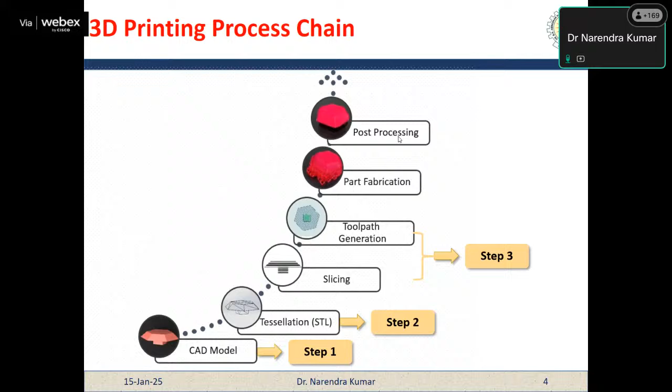So now let me show you the software packages available for use in the 3D printing domain. Here I have summarized some of the CAD modeling packages, in both categories: open source and commercial. In the open source category, we have FreeCAD, Google SketchUp, OpenSCAD. Other software is also available, Tinkercad is there.

But when I talk about the commercial softwares, here we have CATIA, Creo, SolidWorks. Fusion 360 is also very popular, SolidWorks is very popular, and CATIA was very popular 10 years back. And Pro/E, nowadays known as Creo - 10 years back, CATIA and Pro/E were on top in the commercial category, but now SolidWorks also has some place in this category.

And if I talk about the slicing and STL repairing packages, under the open source category we have Meshmixer, we have MeshLab. And under the commercial category we have NetFabb with Fusion 360, and Magics from Materialise. It is also very popular. Okay.

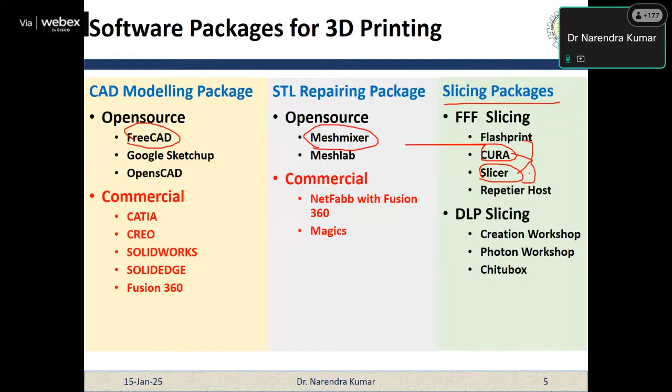So you all know CAD modeling is the essential step, right? Because as per the definition of 3D printing, it is a process by which we can convert the CAD model into reality. If you have any idea in your mind, the first step is to convert that idea into a CAD model, then CAD model to physical model. So the CAD model is a very essential part.

If you go into the market, you will find various software, as I have mentioned in my previous slide. So here I will be discussing FreeCAD. It is an open source parametric 3D CAD modeler. So here I will stop my presentation. I will directly switch to the software part.

So here now I have opened my software. Okay, this is at the bottom. You can see that here I have opened the FreeCAD software. So when you open it, this kind of window will be opened. And it will ask which theme you want to keep, light theme or dark theme. So here I have chosen the light theme, because I like it.

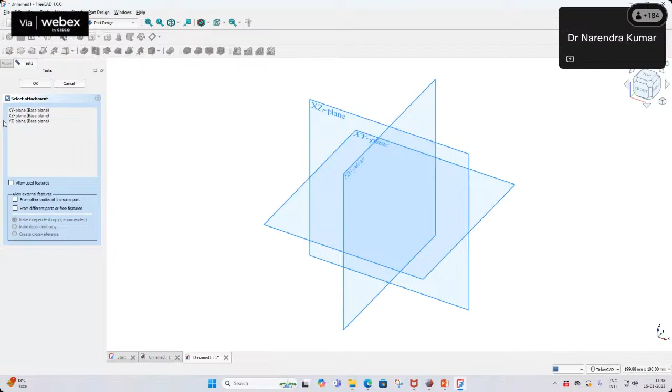And on the left side, there is the option to create a sketch. When I move my cursor there, it is showing create a new sketch. So I will click on it. Now it is asking to select the plane. In 3D printing, generally we do sketching or CAD modeling in the XY plane, because the XY plane belongs to the build platform. So here I am going to select the XY plane, and then I will click on OK.

So the window is quite similar to SolidWorks, right? Once I click on the OK button, other options will appear on the top in red color. If I move my cursor here, the message is create point. Second thing is create polyline. And there is another message, M key cycle behavior.

And once you press the M key after selecting this, for example, this is polyline. So now I am drawing a polyline, like this. If I press the M button in between, you see what is happening. See, the behavior of this line is changing, right? So we can change its nature by just pressing the M button. For example, this is my closed polygon, which I have drawn using this polyline command.

Now, for example, let me tell you the dimensions, right? Because how we will do the dimensioning of this. So for example, this is my sketch that I want to convert into the CAD model. So from the upper symbol, this symbol A, or the angle symbol is there. So you can give the dimensions.

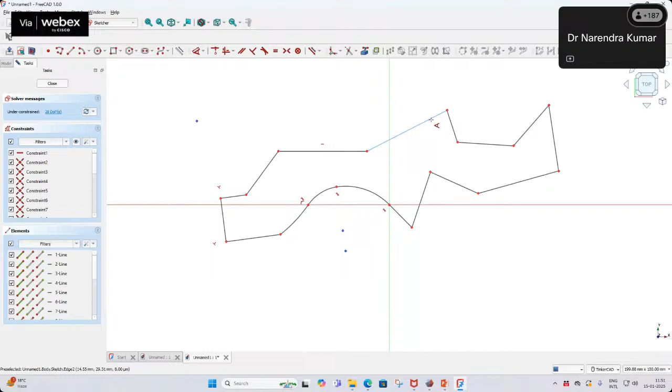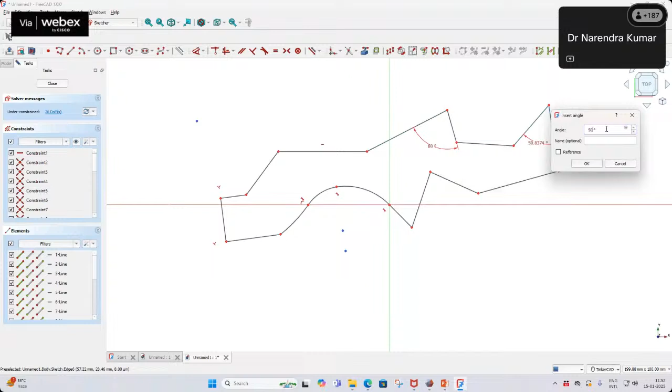And also suppose I want to give the distance, for example, 15, so I can do it. I also want the length of this line to be 30, right? 35 and then 12. Okay. So in this way we can do the dimensioning of the sketch. We can constrain the entities. If we want to fix their position, we can do it.

So this software is very simple, right? And it is openly available. If you just search FreeCAD, you can click on the first link. The current version is FreeCAD 1.0, which I downloaded today itself. So this is how we can easily download it. When you click on the download button, the downloading is started.

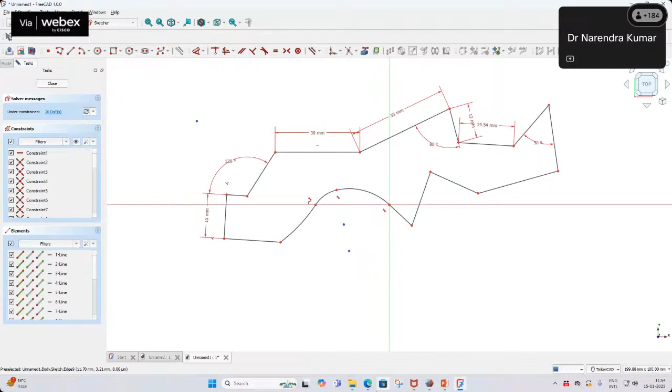Some disturbance is there. Ravi sir, please check. Some disturbance is coming, I don't know where from. Okay, I'm checking, sir. No issue.

So let me close it, right? When I close it, some new options appear on my screen. Previously on the top, I had the options related to sketching, but now the options are related to CAD modeling, to convert this sketch into a 3D model. So on the left side, we have a pad command. Pad. This is, I think, similar to CATIA. There also we have the pad command.

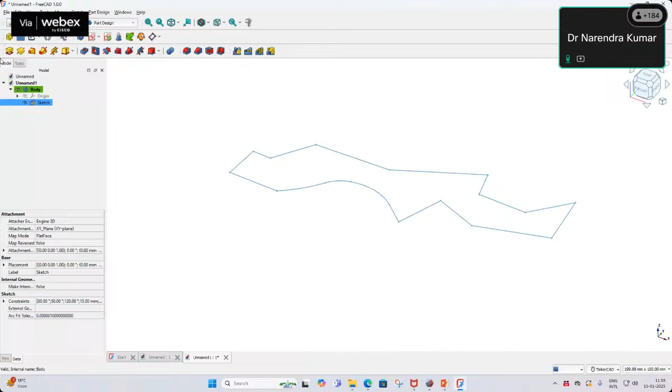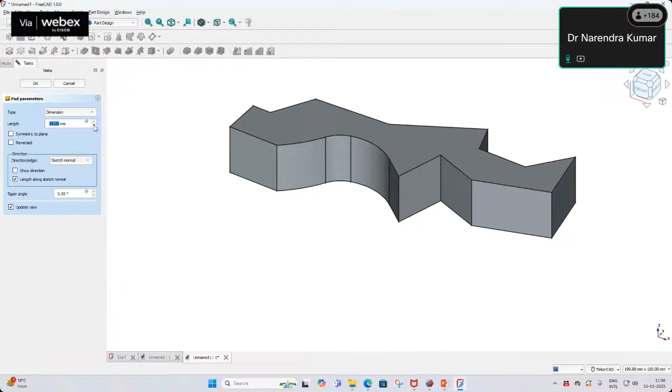So in the pad, see, when I click on the pad command, what is happening? Now my sketch has been converted into a 3D model, or we have given the thickness along the Z direction. So see what is happening. I can change its thickness. I can change it to 5 mm. I can keep it to 50 mm also. I can directly write 50. So its thickness will be changed immediately.

So again, if I want to edit it, I can do it easily. So these kinds of features are provided in this software that can be used for CAD modeling. Now let me keep it to 10 mm only, otherwise it will look very weird. Now if you see, my model has sharp edges on the corners.

So for example, suppose I want to give the fillet or the chamfer command. I will use this. I will pick this edge, this edge, this edge, this edge. So let me do the experimentation. You can see the radius currently. And from here on the bottom I can use it for all the edges. When I click on all edges, it will automatically pick all the edges, whether they are on the top, the side or the bottom.

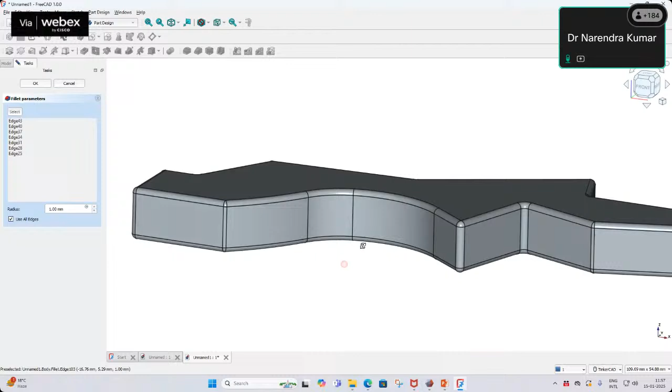And suppose I want to change this radius to 2 mm, 3 mm, 4 mm, 5 mm. Up to a maximum it is taking only 4 mm, because otherwise it will not be possible. So let me make this model. So now this is my CAD model. My objective was to prepare a CAD model for 3D printing, right? So can anyone tell me what is the next step? What do I need to do now?

Ravi sir, please allow participant to speak.

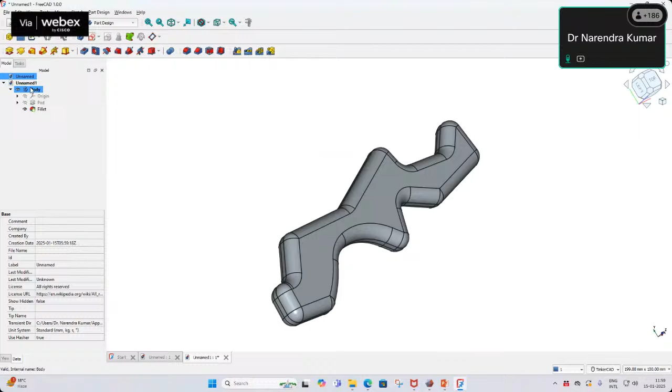Sir, to prepare STL file. Yeah, prepare the STL file. Very nice. Okay, so now what we will do? We will go for the STL. Okay, first let me show you one error actually that may come. See what is happening. Select the objects to export before choosing export command, right? So because I have not selected any object, that's why it is not.

But now I have selected this. So now when I go into the export command, I will find the various file formats that can be selected. So here we have the 3D manufacturing format. Additive manufacturing format is also there. This is also becoming very popular nowadays, right? Because STL has many issues, so that I will be talking today.

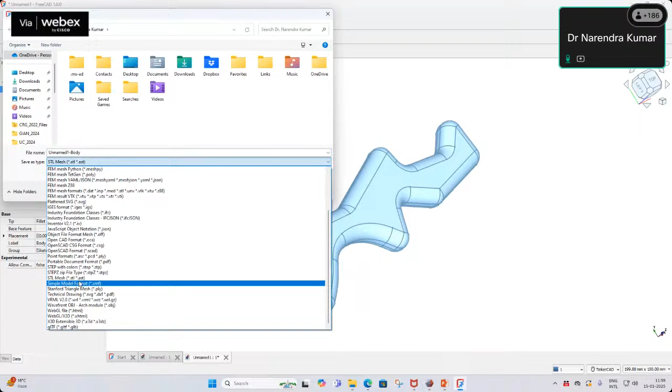So let me select the STL from here. Okay, so here I think we have this STL mesh. Can you see this STL mesh? And in bracket we have the extension .stl. So let me give the name. So I am just going to give this NIT KKR, right? NIT KKR, and I will select this.

Okay, now I will open my STL file, right? So this is my STL file, and I will open it with the notepad. Can you read this? Can anyone tell me the meaning of this text? No, because we cannot read it. This is not human readable, that's why we cannot read it, right? But now you can see the length. We have almost 19 lakh characters into this single STL file.

Now let me go back to my presentation. Up to this point we have discussed the features of FreeCAD. So now because we have exported the CAD model into STL file format, the file is ready for slicing, but before slicing I will check my STL file whether it is correct or not, whether it is accurate or not. So what is the meaning of accuracy? That we will understand, right? So in order to edit or check or see the STL file, we can use Meshmixer.

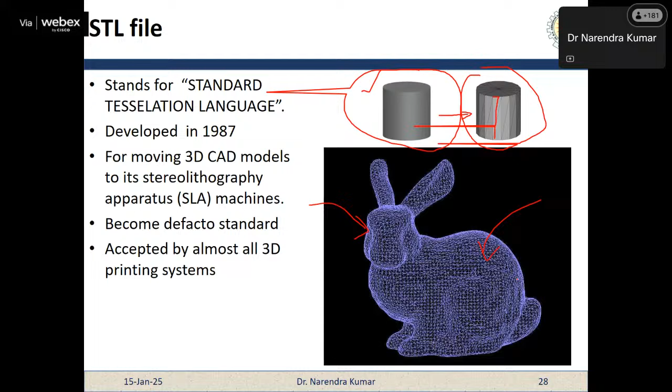So STL is nothing but the triangular representation of a 3D surface geometry, and here we just export the information in the form of the facet and the normal. Due to the time restrictions, I'm not going in much detail.

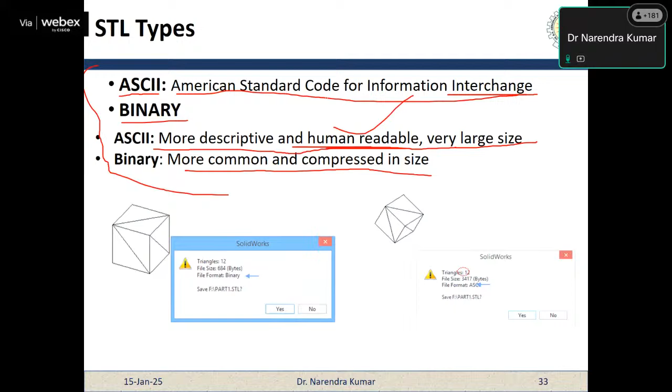So this is a typical example of an ASCII file format, and here we have the example of a binary STL file format, right? Now, what are the advantages of the STL file? Why are people using this file format in the 3D printing domain? The first advantage is it's simple to understand and very simple to code, because I told you that we can easily open the STL file in Notepad.

Second thing is that it minimizes the computational overhead during slicing. This is very, very important. That's why I have changed the font of this statement. How? Because it contains triangles. For example, in the case of a cube, only 12 triangles are there.

Slicing is the essential step of 3D printing because it's a layer by layer technology, because we add material in layered form. So in all 3D printing cases, we have to slice the CAD model into layers. So with STL file, it is very, very important, right? Because it minimizes the computational overhead.

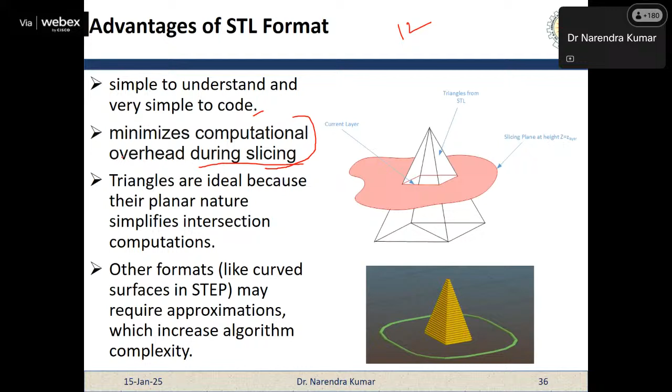So that's why it's very popular, because triangles are ideal due to their planar nature, and they simplify the intersection computation. This is one of the reasons why people are using it, and nobody is able to get rid of this file format.

As it has some advantages, it also has some disadvantages, like long syntax, and it is many times larger than the original CAD data for a given accuracy parameter. Because if you do not maintain the parameters of the STL file, what will happen?

You will not be able to capture the original CAD data surfaces accurately. So for the given accuracy parameter, if you go for the STL, obviously small triangles will be used there, or the number of triangles will be more. So it will be very large in size compared to the original CAD data, and it carries much redundant information.

How? Here I have taken one case, this one. So if you see, we have 1, 2, 3, 4 triangles, right? So when we export this data into STL file, what will happen? There is one common edge between 1 and 2. Similarly, between 2 and 3, 3 and 4, and 4 and 1, right? So what will happen when we export it into STL file?

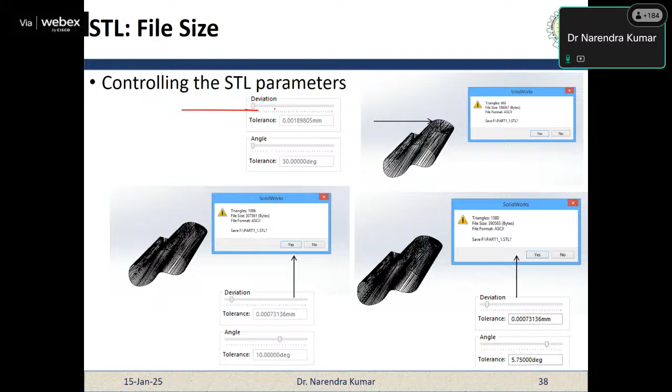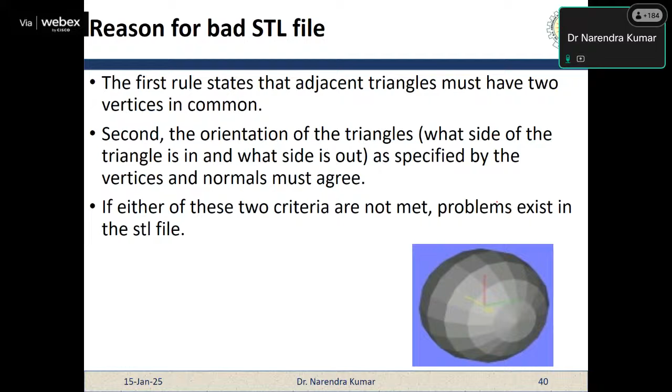So this is how we can change the parameters. For accuracy, you can play with the parameters. There are many reasons for a bad STL file. I am not covering that in detail. I will share this presentation with all of you, so you can go through these errors and what they mean.

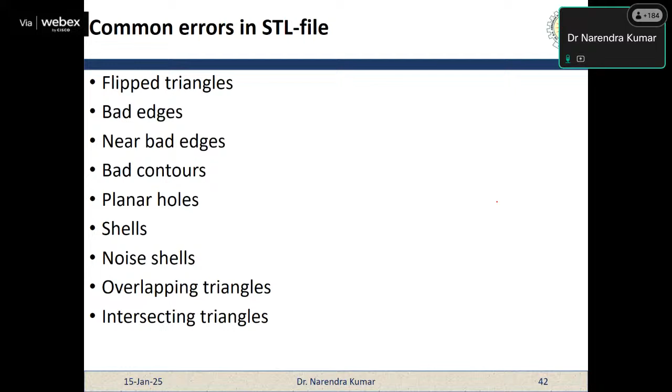Now I'm going directly to the software part. Suppose any error, hole, or puncture is there, how can you rectify it? How can you repair your STL file? So here I am giving you some of the cases. These are the errors: some overlapping facets, some edges overlapping each other, some shell problems. Now let me just go to Meshmixer.

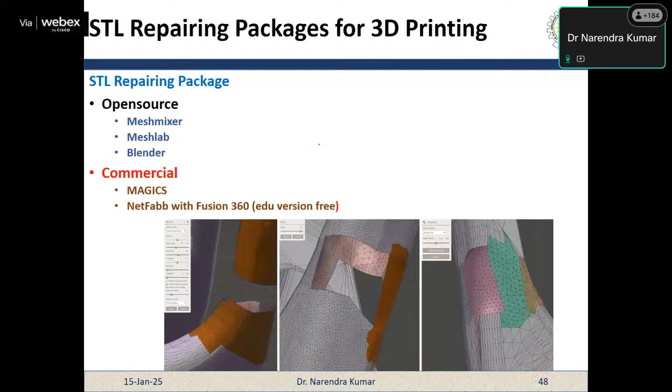So here I have opened this Meshmixer window. This is the user interface of Meshmixer, where you will find some options on the left side, some options in the center of the screen, and some file-related options on the tab on the top, feedback, help.

Although Autodesk has discontinued this version of Meshmixer, they are not updating it because they are promoting their next product, NetFabb with Fusion 360. They are promoting that one because it is commercial, but its educational version is free. So they have discontinued this software, but it still has a lot of features that can be used.

Now let me import my file, the file which I prepared. Where is it? Yeah, this one, NIT KKR. So this is my file.

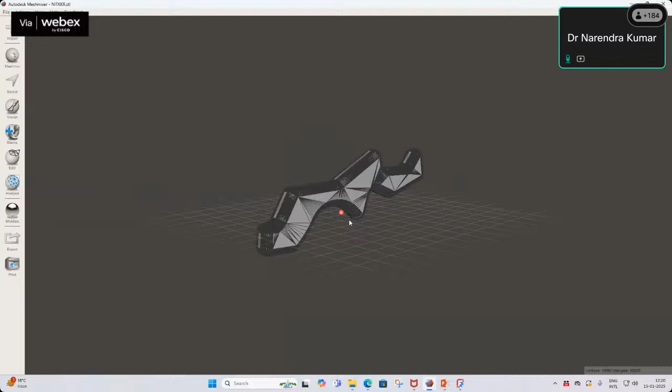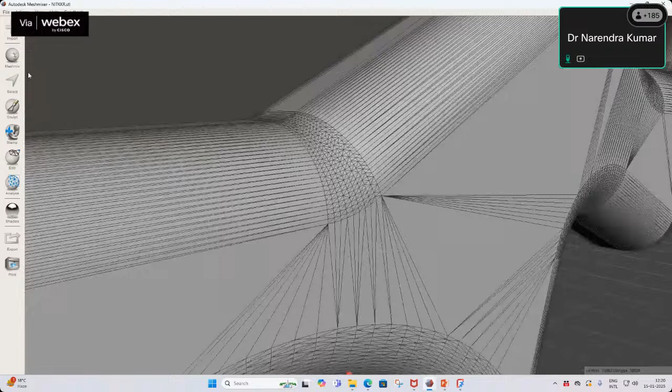So you can see the triangles, right? I'm zooming it. Now you can see the triangles. Can you see the triangles, Ravi sir? Yes, yes, participants are writing in the chat box that they are able to see.

Okay, so you can see this because my model has curved surfaces on the top, sorry, on the edges.

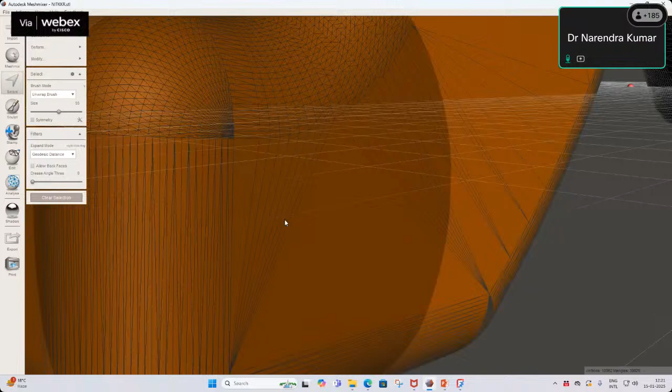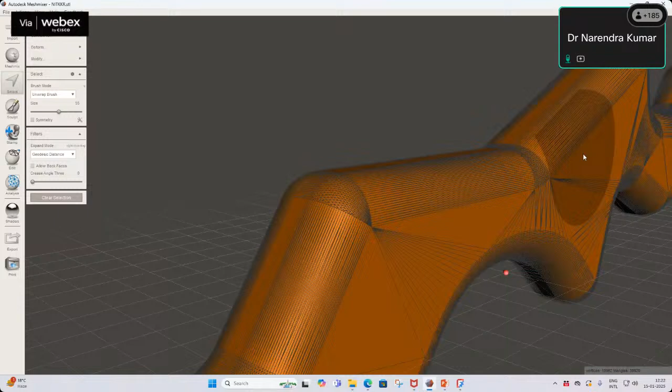Okay, so wherever I am having a flat surface, the number of triangles is less, right? On curved surfaces, to approximate the curved surface, we have to increase the number of triangles. So just for example, here we have the curved surface, and we have more triangles in this region only. So triangles are varying in number depending on the type of surface, whether it is flat or curved.

Now, for example, I want to edit this. I will check my model first, I will analyze my model to see whether it has any kind of problem or not. So when I inspect it, I don't find any kind of error in this because it is a closed model.

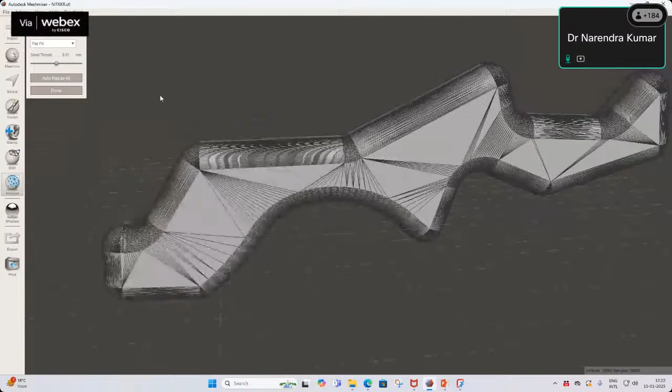But for example, deliberately, what I will do is delete these triangles. Okay, now you can see the hole. Can you see the hole in the STL file?

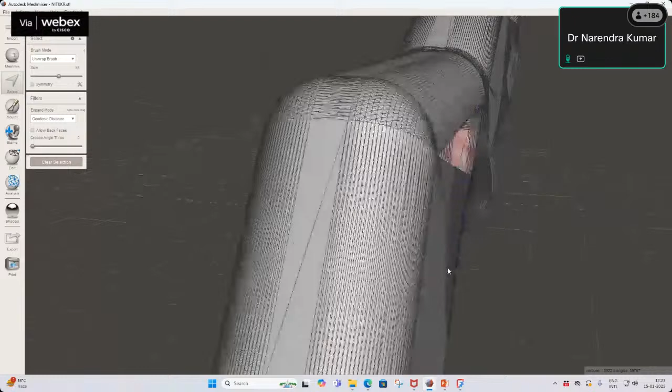Deliberately I have deleted this patch, this triangle, from my STL file. So now I can see inside my STL file because of this hole.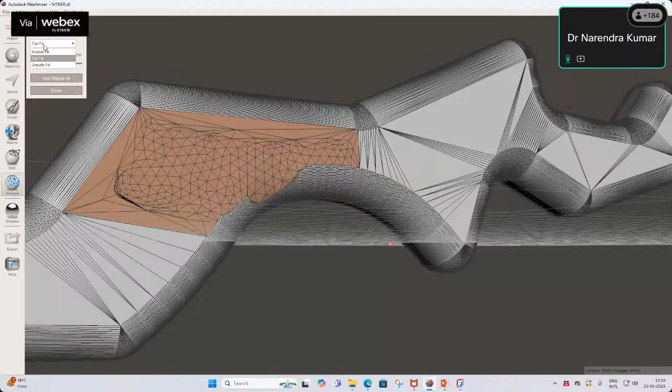Now again I will inspect the STL file. It is showing that it has a problem. See, what happened? Because I selected this option, flat fill, that's why this curvature has been deteriorated. See, now it has become flat.

So instead of going for flat fill, I will go for smooth fill. Now it has filled the file smoothly. See, from the side also.

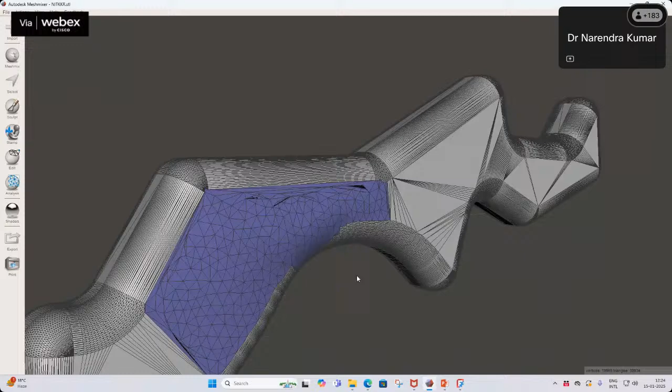Let me change this. Under view, platform, where is it? Yeah, grid, I have removed it. Actually, it was hindering the view.

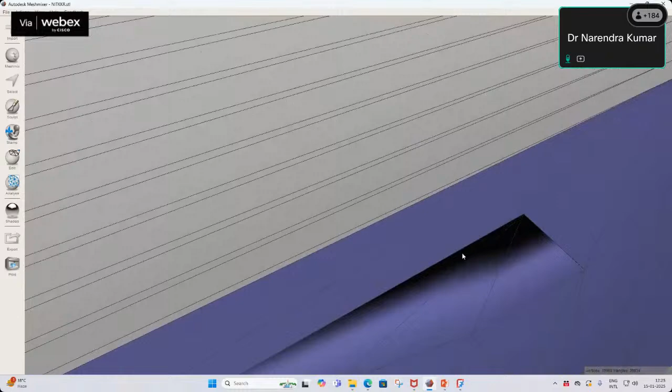Right now, again there is a problem. When I use the inspector command, there is still a problem with my STL because here I am having missing information. Although it is closed, it is having some sort of error. So in that case, I can go for the brush.

Okay, so I can, I think it has... let me see what is happening. Let me reduce the size. So this was the case, and from here I have chosen this.

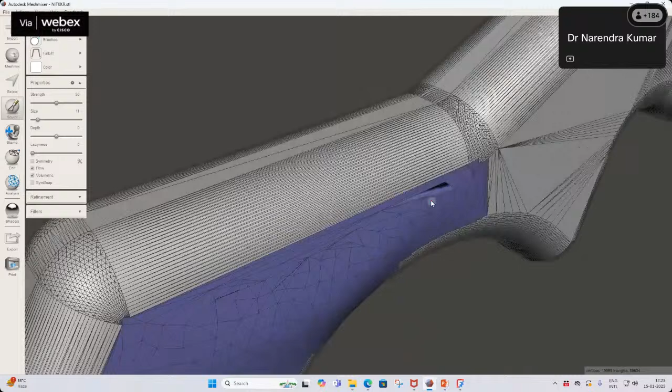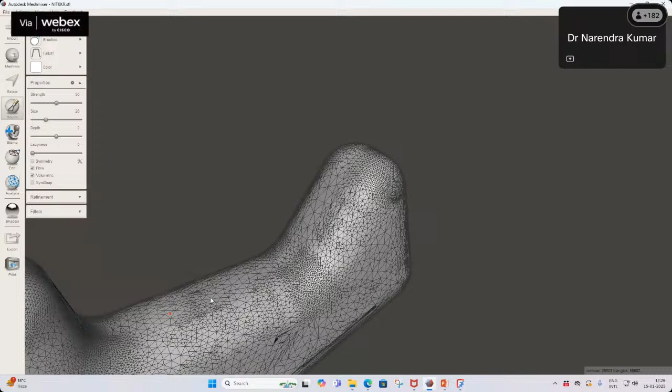See, it is smoothing the STL file now. It is increasing the number of triangles. See, earlier... I am smoothing my STL file. See, the triangle count is changing. And now my STL will become very smooth. So with the help of the brush, what I am doing is smoothing the STL file. Now can you tell me the number of triangles in my STL file?

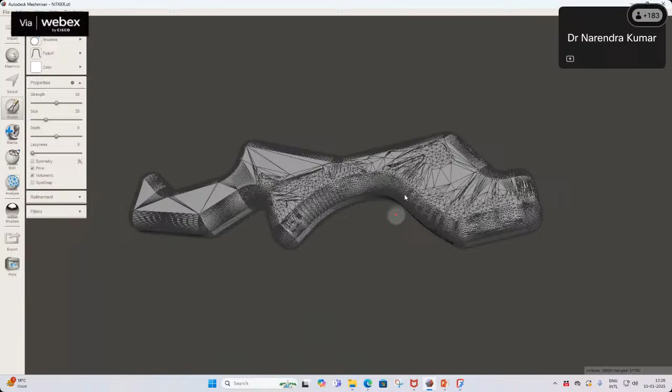Can anyone see the number at the bottom right? It is approximately 28,898. As I am using this brush on those triangles, it has now become 30,119, now 30,288. This is because as I am smoothing my STL file, it is increasing the number of triangles and increasing the accuracy of the STL file.

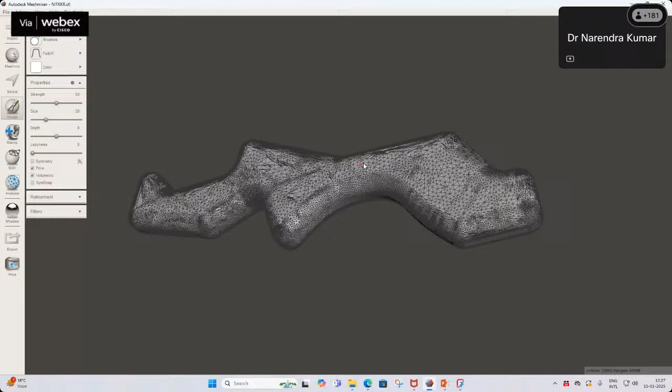Now the triangles are 65,096, sorry, vertices are 32,550, triangles are 65,096. Sorry for the error. Now suppose I want to smoothen this surface. Now the triangles are 68,194.

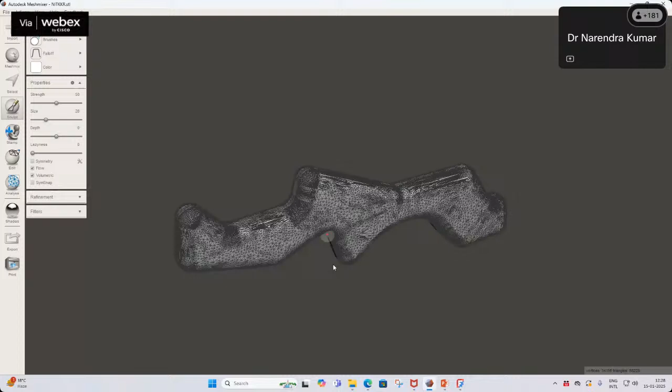Similarly, suppose I want to smoothen this part. So in this way you can edit your STL file, or if any error is there, you can repair your STL file. So suppose this region is also left, I will also smooth this region.

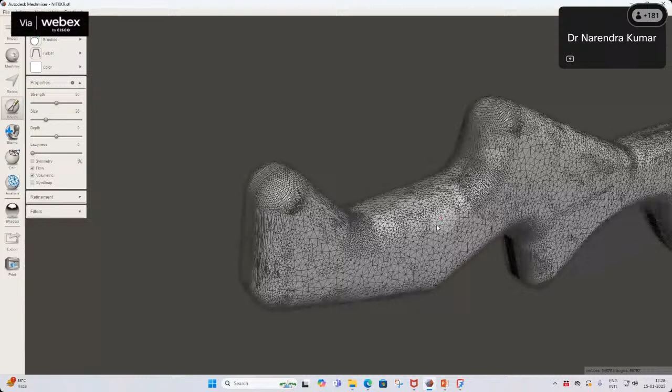So now my file is very smooth and very accurate. I can change parameters from here. So in this way you can modify your STL file.

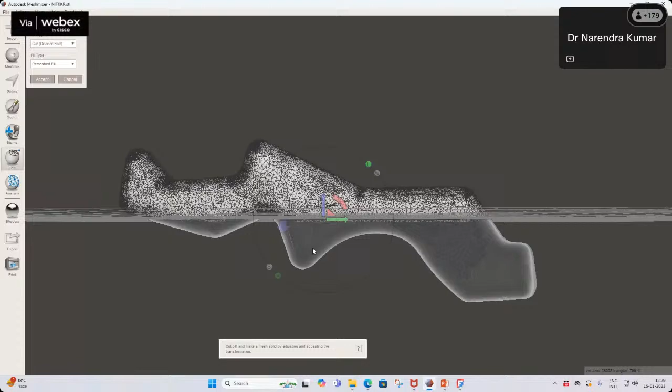For example, now I want to cut my STL file into two parts. Let's say I have a dual 3D printer and now I want to make the part using two different materials. So from here I will cut my STL file.

You can see that now we have some options like no fill, minimal fill, remesh fill, fixed fill. Remesh fill means, because as I cut this STL file into two parts, we will have two holes: one in the upper part of the STL, and one in the lower part of the STL file.

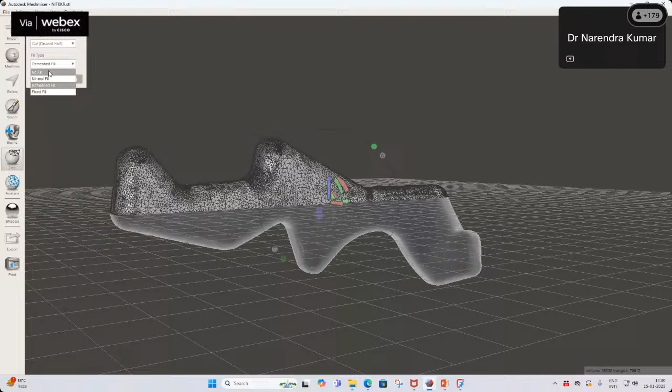Let me show you first. Initially, I am using this no fill option. Now what is happening? You can see this is not closed at all, and the bottom portion has disappeared. Why? Because here we have selected cut discard half.

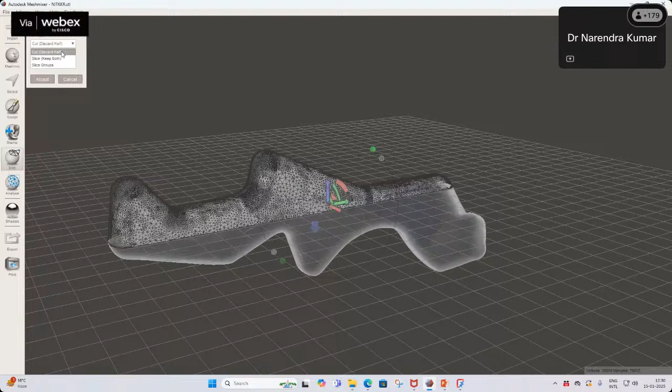But from here, let me show you the no fill and the remesh fill. Now, because I have chosen the remesh fill, that hole has been filled by the software itself. Earlier, because I did not choose the option, we had the hole.

So here, I'm going to just keep both the parts with me, because I have to print both parts using my 3D printer with dual material. So I will keep both the parts, but here we can see the parting line, a small thin line, indicating the plane where we cut the STL file.

Earlier, when I was using the same command, it was selecting the whole part. So now I can easily export this upper part into an STL file and also the lower part into an STL file separately. So two separate STL files will be exported for dual printing.

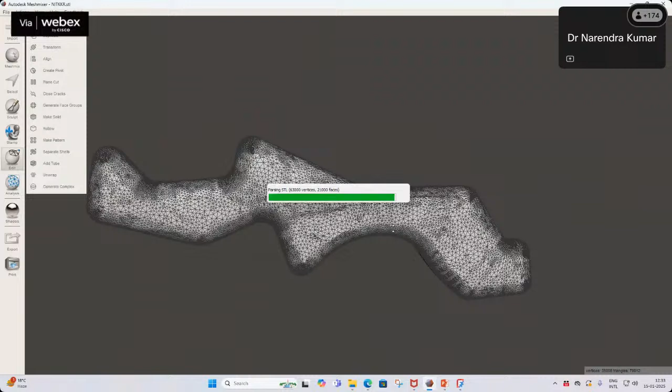So this is how we can do it. Now let me show you some other feature of this. To show other features, I will replace the part with the bunny. Where is it? I think it is in the Meshmixer library models.

So I have imported this bunny model, and here you can see that this model also has a hole at the bottom because we can see inside of the STL file. So I am going to inspect my STL file first, it is showing inspect and repair mesh defect. This blue balloon is showing the boundary of the hole. So here I have chosen this flat fill because I want to.

Dr. Narendra, sorry to interrupt, I think your slides are not visible now, please check. Sir, I have not changed my setting yet. Let me check, maybe again due to some network issue and all.

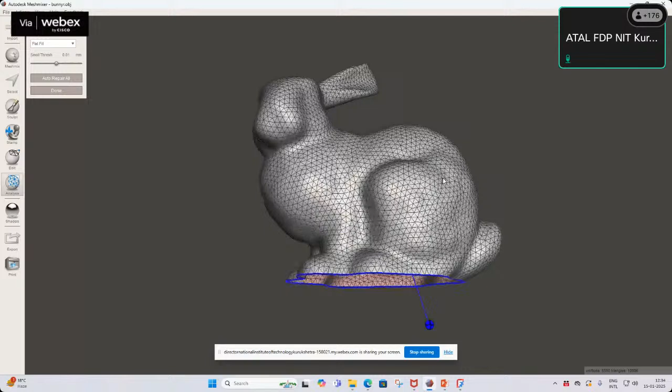Now tell me sir, yeah now it's coming, okay, thank you. Participant, can you confirm whether my slides were visible to you or not? Yes it is visible, now it is visible, but earlier it was not visible. So why didn't you inform me? Actually, you should have informed me. Actually they have written in the message box, so that's why I read that for you.

Okay, thank you, let me show you again. It is again gone, Dr. Narendra. Earlier it was there, how is it possible? I don't know, Professor, what is happening, but from my side there is no issue.

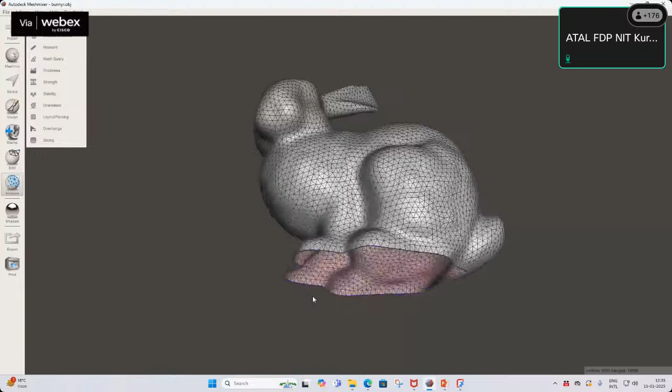Okay, yeah, now it's coming again. Yeah, no issue. So please inform me if you find any issue. Definitely, if you face any difficulty in my slide visibility, please inform me.

So you can see this is the CAD model, or the STL model of this bunny. If I go into the analysis or inspector command, it is showing the same options, flat fill, because this is the bottom part and I want to keep my surface flat.

Now see, slides gone again. Oh what is happening? Somebody is doing something, or is it a problem from my side? I'm not doing anything. It may be some network interruption. Actually we are unable to see, and our participants also. I don't think there is some issue.

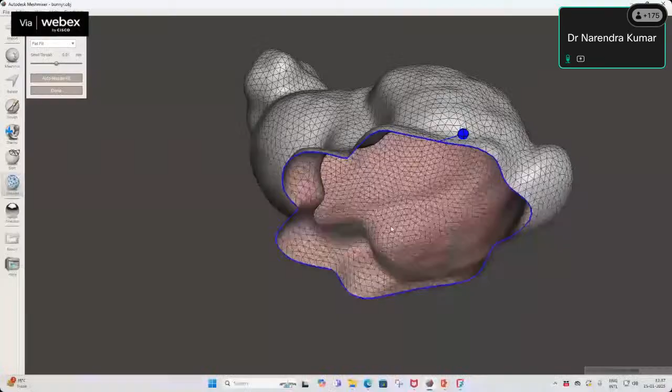Okay, so here now it is visual. Professor Ravi. Hani sir, yes sir.

Okay, thank you. So now you can see that in this object we have the hole, so I'm going to fill it with the flat fill command, and once I press auto repair all, now you can see it has been filled. And it is also having the triangles, meaning the surface created has also been converted into an STL file. So this is how Meshmixer can help us in the repairing process.

Let me show you a very important feature of Meshmixer. Suppose I have downloaded an STL file from the internet, because nowadays some websites offer ready-made STL files. For example, if you search the internet for a Taj Mahal STL file, or Ayodhya Ram Mandir, Ram Temple, you will find many STL files.

So, for example, you want to print them for your application, and somebody has written his or her name on the STL file. You upload the STL file and download it. Now the question is how you will edit that file, or how you will be able to modify it. How can you do this?

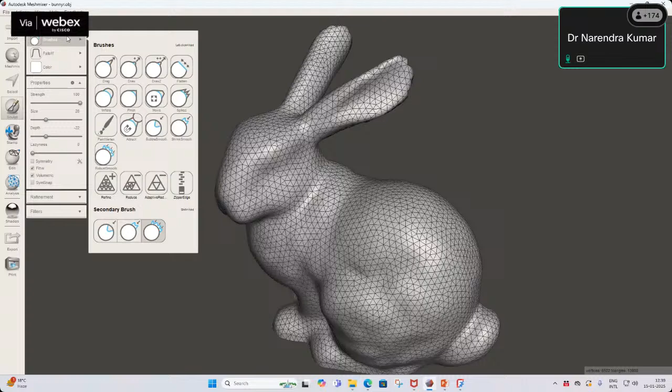In Meshmixer we have many options. For example... one thing I want to show you: I have deleted these triangles only, and now you can see there is a hole in the STL file.

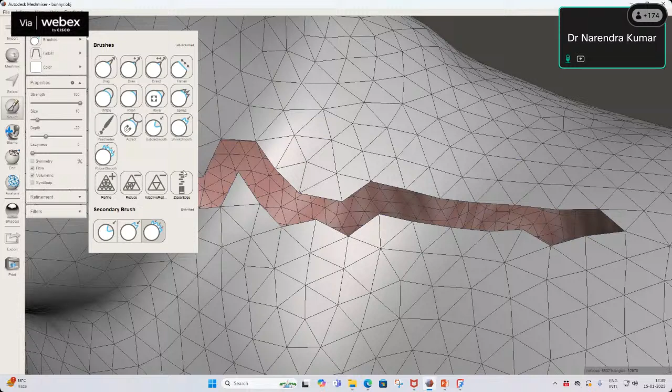Now, for example, here we have a zipper edge command. So if I zip it, it will zip the hole closed. See what is happening. So manually, if you want to fill any gap, that option is also available.

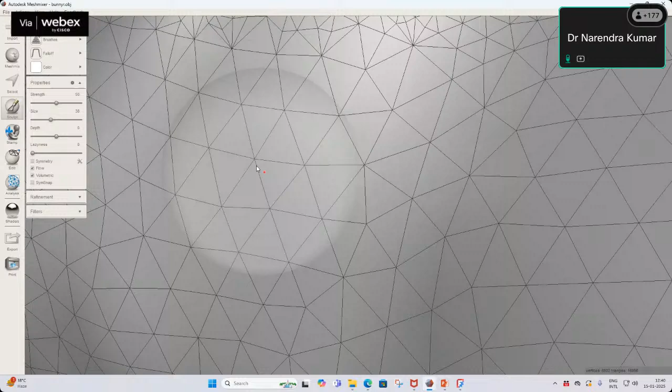Or sometimes you want to refine the mesh. Refine means, for example, here the triangle size is too large, and I want to refine it. So in this selected area, you can refine the mesh, reduce the triangle size, and enhance the accuracy. This is how Meshmixer works.

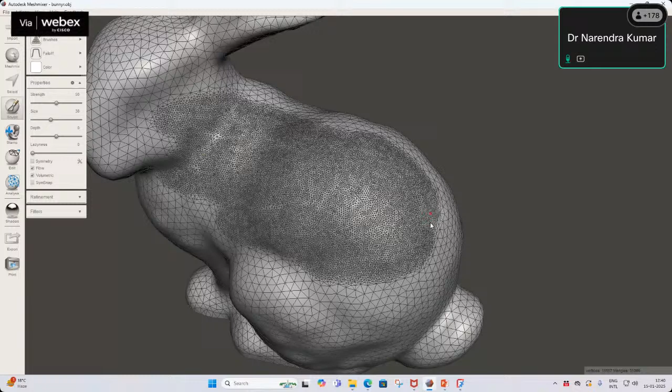Now you can see the difference. In the area where I used the refine mesh command, the mesh has been refined and the triangle size has been reduced. But in the area where I have not used this command, the size is as it is. So this is how you can refine the STL file.

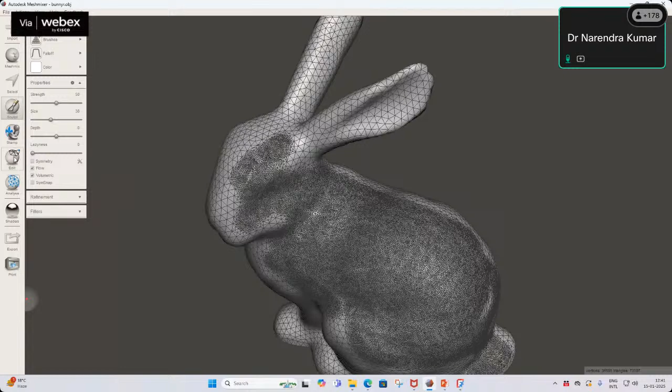And one more thing that is also very interesting. I am going to cut this STL file. So, for example, here...

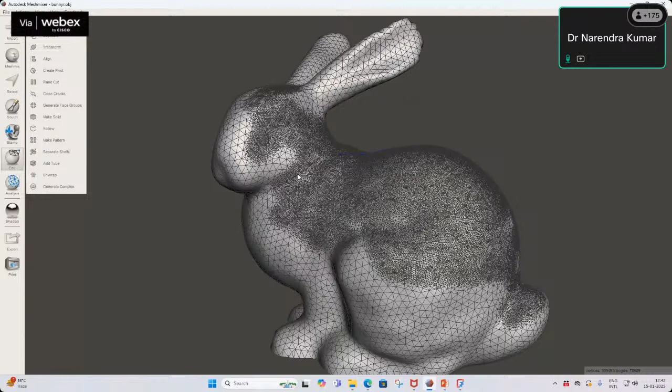For example, here I have cut my STL file. Now what I'm going to do is delete this part. Okay, I have deleted this part, and I want to modify this head with, for example, let's say this camel head. Let me take this one, and also let me change the size.

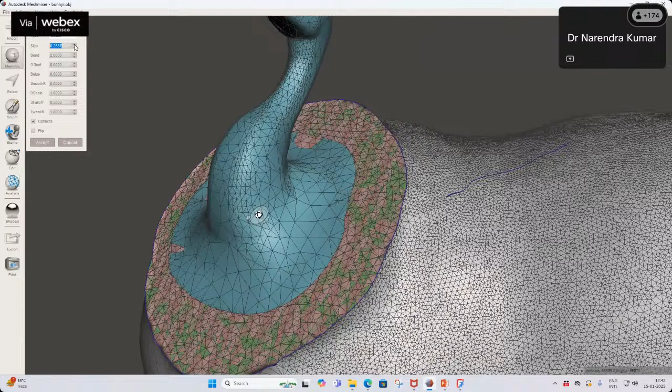I can change its position manually. Right, yeah, from here I can easily guess the position. Oh, I don't know what happened with the software.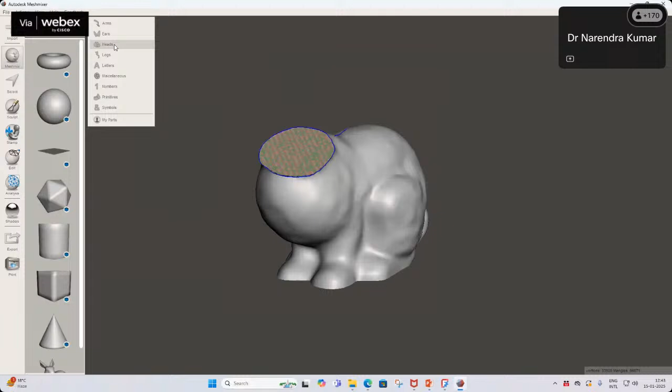So okay, this was my STL file, right, that I have cut down, and now I have added this from the front, and I have changed the size from here, right, and I also want to change it now. Okay, is it fine? Okay, now I think it is fine, right? Accept.

So during this process, what has happened? Here we have some flat surface, this flat surface. Although there is no problem with the STL file, there is no hole, right? But there is a problem with the STL file, right? So I will try to re-smooth it. I will be using this command again, because this will smooth the edges, right? This will smooth the edges,

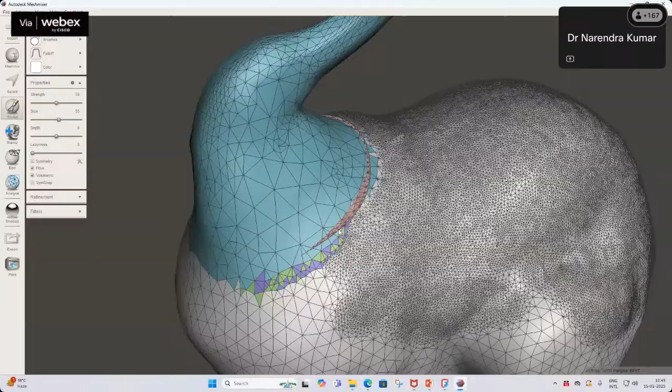and it will also help in the smooth transplant of this head, the virtual transplant, right, not an actual one. So smoothly you can do this process, right? You will never see any kind of joint or any kind of abstraction in this process, because we are using this command, right? So see how the whole STL file is getting repaired.

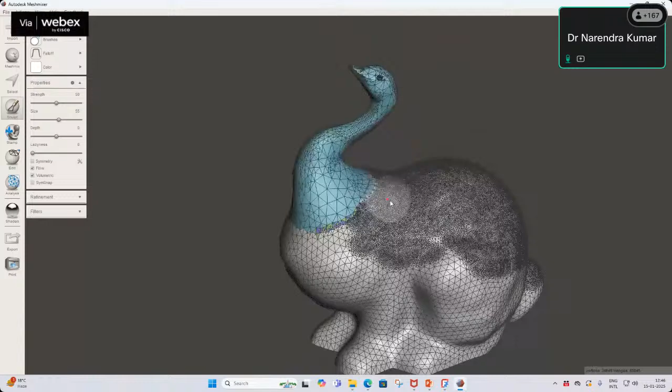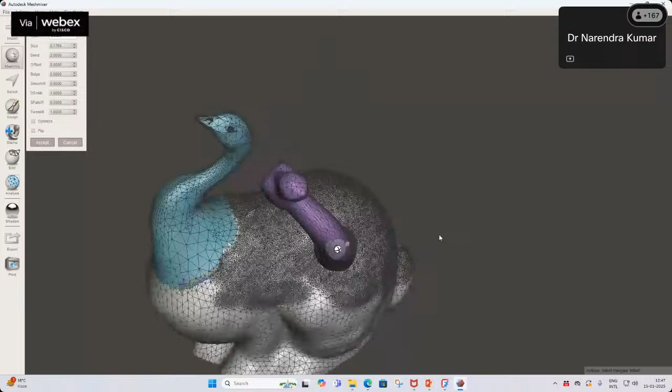So you see how I have changed the bunny model into some hybrid kind of model, right? So this is also possible with Meshmixer. You can also add some other options. Suppose, for example, here you want to... sorry, let me show you. For example, here also I want to keep the camel head. Right? I can change its position. Right? So in this way, you can easily make the models. You can easily mirror it. Right?

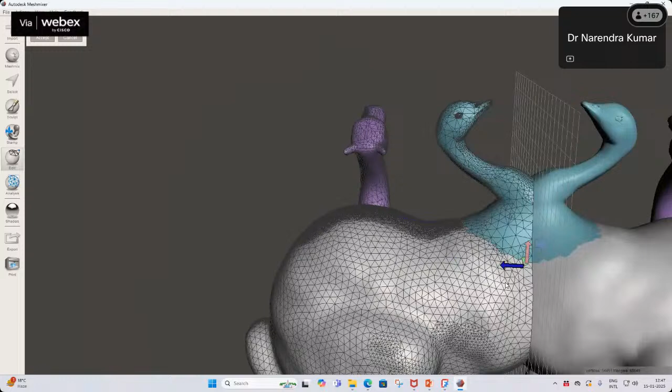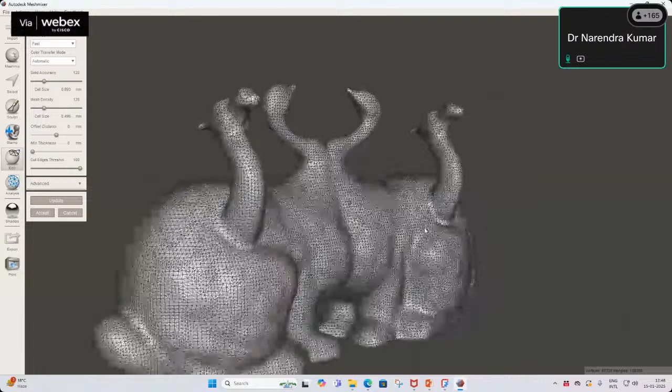For example, you want to make this kind of complex model, souvenirs and new kinds of models which are not available in the market, so you can easily make them. This is the capability of Meshmixer, right? STL editing: it allows manipulation, it allows repairing. So then I can make it solid, right? Now it is solid. There is no separate solid part in this. This is a single STL file now. Can you see? Right?

So with this, I think it is enough for today. If you want to explore Meshmixer, FreeCAD more, you can ask if you have any query. Dr. Ravi, it is all from my side, right? Okay. So this is the outcome of the lecture. You can see the model which we have prepared, right?

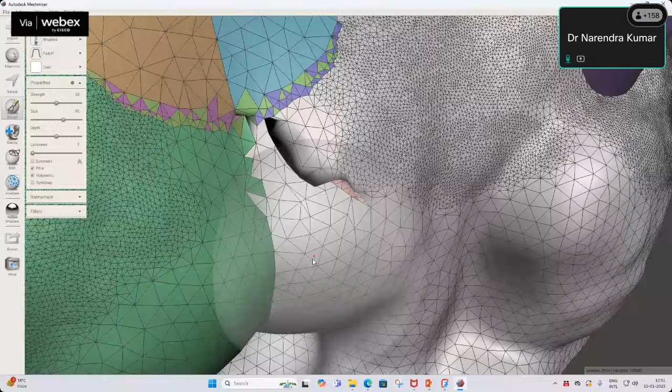Oh, sorry. Actually, now my model has been changed. You can just go in the brushes and use the Zipper Edge command. It will do it for you, because my model now is that much complex. So I can use many other options along with it. So now it has just filled the gap. Okay, filled the gap, and some other parts can also be smoothened by using other commands. So I think now it is clear.

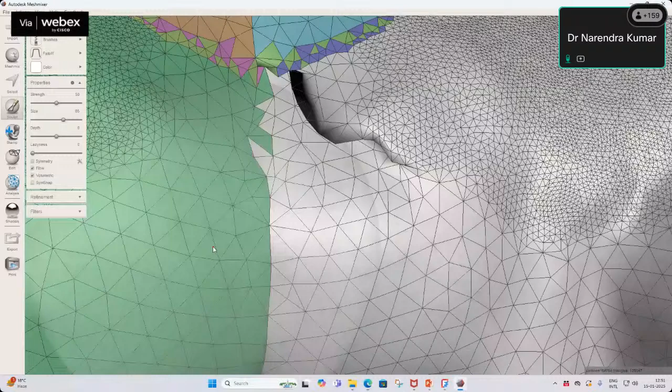How to make the scaffold structures in this. Okay, let me show you. Okay, scaffolding you want. Okay, so in that case I have to take a simple part, otherwise it will... See, actually, it depends on the capability of the system.

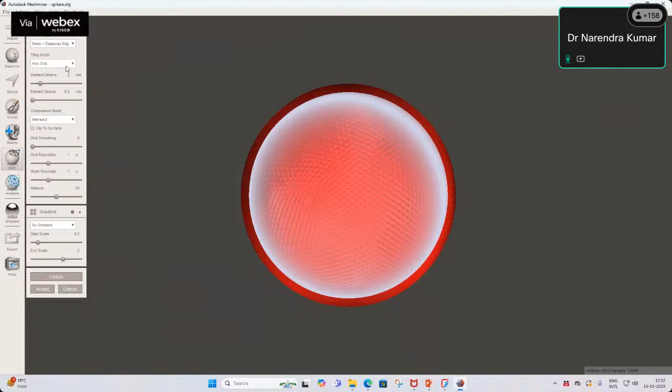There is an option, Voronoi or something, Make Pattern. Let me check. Where is this option? Right? Yeah, this one. This option is there, and from here I can use the... Can you see it? Dual Edges. Let me check this dual edges. It is visible. So this is your scaffold kind of, see, but it is not visible because in that case I have to modify my...

But you can see it in the simulation itself, because I have used this. It is not taking right now because I have to change the mesh size. I have to increase the size of the mesh. Then only it will take. Otherwise, you can apply this on any kind of model. You just check the mesh size, and you can make the scaffold easily.

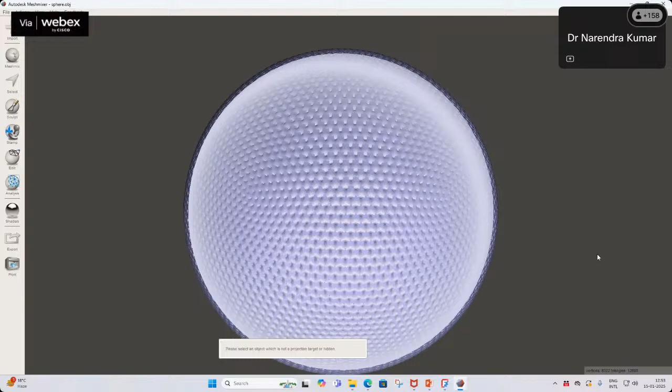Under the Edit command, here we have the... You see, this kind of shapes you will be able to make easily. In that case, you have to make a simple square or cube. Okay, you can apply this technique under Edit, Make Pattern command, right? Under Edit, and now it is actually hanged. So you can just do it. Okay.

Biomedical image like PET scan. CT scan or PET scan? What? CT scan? I'm not getting your query. CT scan. One query is there, posted at 12:07. Here, sir: how to convert an image like JPEG format into STL format?

See, JPG to STL, we have some sort of tools, right? Just type image to STL. You will find many websites offering this particular facility to convert your JPG to STL. And you can also find my research paper in my Google Scholar profile, where we have developed an algorithm to convert JPG to STL file. But still, for the application part, there is no need to go for algorithms.